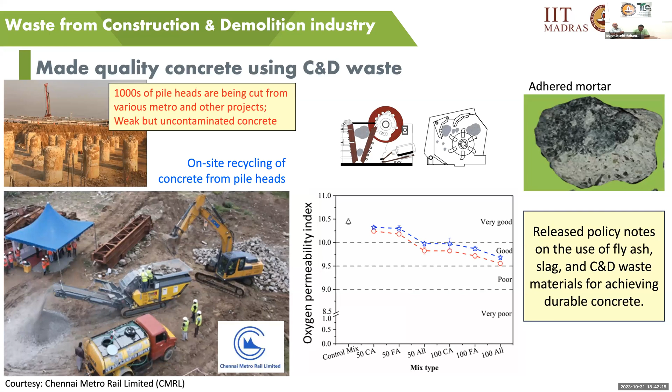Such concrete is very weak in strength, but at the same time they are really good, uncontaminated concrete, so that aggregate from such concrete can be really nicely used. In this demonstration project, we worked with Chennai Metro, and demonstrated how we can crush or process this waste and make good quality concrete. We looked not only at the strength properties but also the durability properties of concretes made with such material. We have also sent policy notes on how to use various waste materials in concrete.

Another project we took up: we have been working on durability of various concrete systems for several years, even before the TLC2 center came up. This was a good opportunity to take this research output to the field and implement it. In this project we worked with a government agency, the Kerala Highway Research Institute, where they were building a major bridge on the coast with a target service life of about 100 years. They were using M40 mix designs with OPC type concrete.

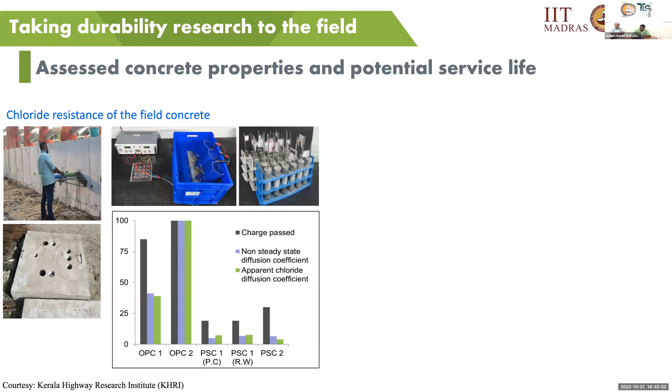We found that the durability of such concretes can be very, very high compared to OPC concrete. We also looked at service life estimates and found that by using slag concrete, the service life can be about 4 times more than OPC based concrete. This was very promising, and they were very happy. Now we know they are actually implementing this type of concrete in other bridge projects as well.

But to actually implement it on site with good quality control, we have to specify certain properties, for which we developed nomograms that look at the properties of the binders and structural design aspects. Then we say, if you use this, you have to go with this type of concrete, which will have a durability parameter I'm calling MXDY — M stands for mechanical parameters and DY stands for durability parameters. If you're talking about a target life of 100 years or so, we have to bring in a durability parameter to specify the concrete. That's the whole idea.

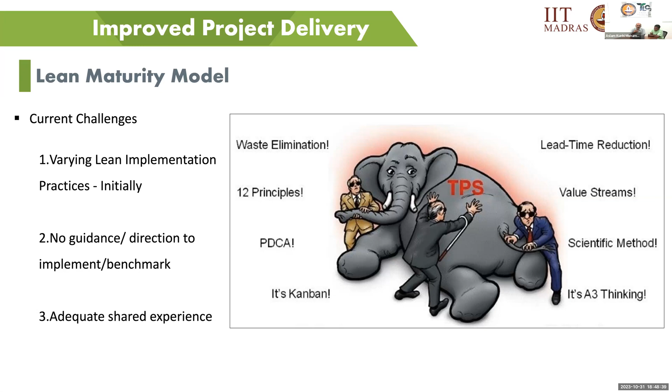Moving to the next slide - when we look at the lean maturity model, as I said, we needed a roadmap, and we also needed to assess. Several organizations claim they are implementing lean, but we wanted to assess where they actually are.

They might say they've been implementing lean for so many years, and they talk about the project benefits they've adopted, but we wanted to start - because in the initial years there was a bit of a distributed approach, since people needed to explore where they stood.

But we needed people to start converging on best practices, so we looked at a holistic approach to cover lean. We take these dimensions: top management support, process, people, partners, methods and tools, and technologies. These are the key dimensions where we feel there should be progress for holistic adoption of lean.

One limitation is there's no local context to the Indian context - when you try to take benchmarks from these models, there's no relationship to what's happening in India, so it just doesn't make sense. There was also an inability to do relative comparison and other issues - the models were too theoretical, with too many weighted indices, so we just weren't able to go forward with them.

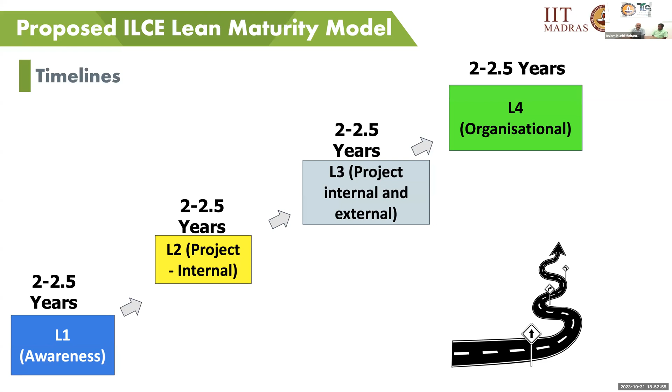So with this, we needed to start calibrating to see if this model works or not. What you see is a photograph of a cement plant under construction. A team of us went here and tried this. This group was implementing lean on the project, and we spent 2 days at site to look at all the dimensions.

You can see there's a full planning board there, teams of planning staff, and teams of execution staff also there. The impressive part of this group was that lean was actually practiced in several processes at the site level. However, there was absolutely no documentation. So when you asked, people knew things, but there was no way they could deep dive or go into more detail because there was no documentation.

So we are actually positioning this group right now at an L1 medium, because having a documented strategy and process is a very important part of being able to move forward.

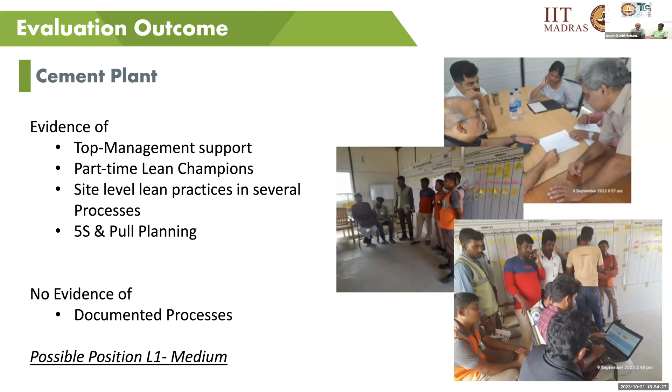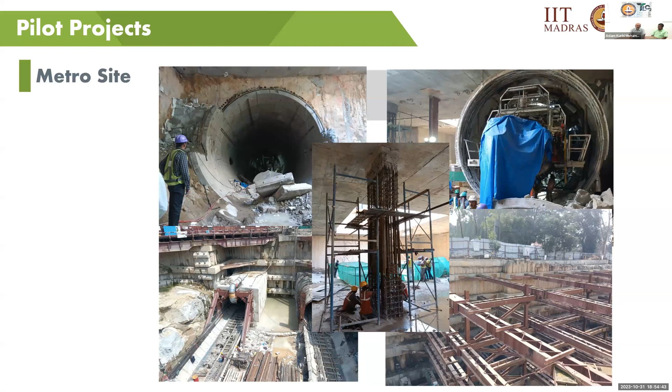Going to a second example, this is a metro construction. There are several metros going on site. You can see a little bit of the tunnel as well as the station construction. There were several stations in the scope of this work. We visited all the stations, visited the head office, and did meetings to assess what the kind of implementation was.

Here you can see there's evidence of top management support. There were part-time lean champions. They had very good documentation of the process, and there was very good awareness at the office. Any person you talk to in the office really had a good grasp of what they were doing.

But when you went to the site and started going down to the last planner, or into detail on how teams were actually implementing it on site, there was a breakdown in communication. So while the documentation was good, it looked like they could do a little more to get this thing going to the site. Of course, this was a much more challenging, much bigger site with a lot more details. So the best position, we have not yet placed them, but the best position they can go is L1 high. We are going forward with this.

Part of the TLC2 agenda is to be able to formalize this as a framework and get other projects in India to adopt these practices. And for review and refinement, we need more pilot projects.

And one of the feedbacks we always get is this has to be aligned with corporate benchmarking, whether it's with lean or with sustainability, and to bring sustainability parameters also into this benchmarking so that an organization does not have to do different kinds of maturity assessment, but does a holistic single-time assessment to be able to assess where they are.

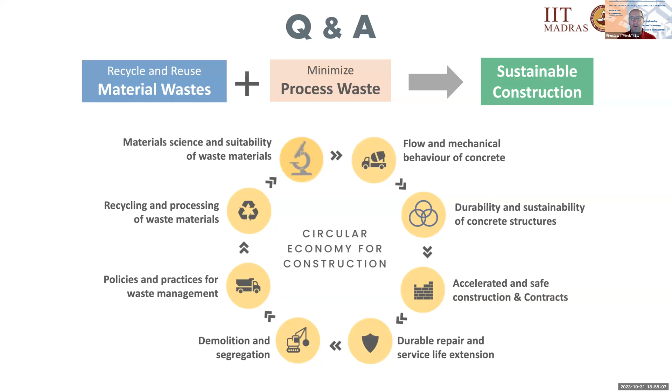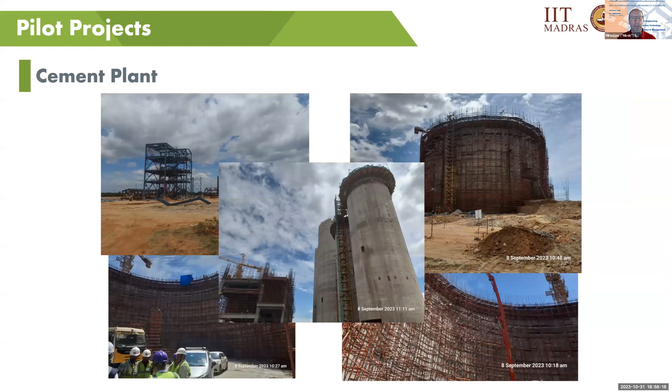Out of which grows the concept of Construction 5.0. It's essentially the effort to build upon the achievements to date of Industry 4.0 and Construction 4.0, and there's a lot of documentation and literature on that, to take advantage of information communication technologies and automation technologies and put them into service of sustainable industry, and in our case, sustainable construction. In other words, we are interested in environmental sustainability as well as economic, but with emphasis on environmental sustainability, as well as resilience, particularly to climate change phenomena that are, of course, very well discussed and always on the forefront of popular press and discourse around the world.

But in addition to that, there is also a renewed interest in human well-being. In other words, there is a need to emphasize the well-being, the satisfaction of work of all the participants, all the stakeholders that participate in construction projects.

I would like to ask the audience, anyone who would like to speak to that, as to how the ongoing efforts at IIT Madras relate to recycling of construction materials, recycling the waste in particular that is being generated. That waste is really staggering. According to statistics in the United States, about 60% of all the volume of solid waste in municipal waste sites is actually construction related. It's either waste from new construction projects or retrofit projects, or just outright demolition. And there is very little recycling.

According to some estimates, at least on the East Coast of the United States, less than 10% of construction-related waste is being recycled. The rest of it is actually ending up filling up the volume, the space in municipal waste sites. What can the existing body of knowledge in construction engineering and management accomplish in changing that?

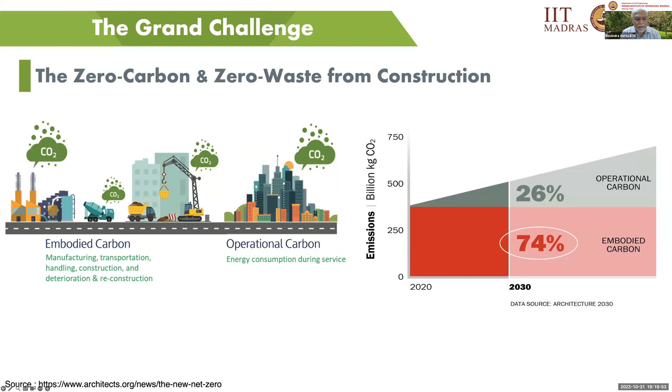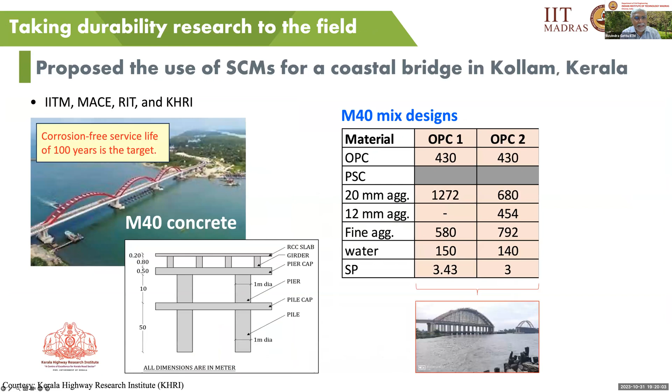So we said we'll try to come up with a framework, a chart for any site, which would have indices based on 4 components. One would be embodied energy, which also reflects the cost and use of raw materials. The strength of the concrete, what could be the mix shown here. The other component would be durability.

We insist that durability is key to designing something sustainable with concrete construction. We cannot afford to have something that's not durable enough. The 4th aspect would be environmental, bringing in the carbon footprint. We strongly agree that carbon footprint is not the only way to look at sustainability, it's much broader.

Now, as Ashwin said, we have to start looking at it from the design point of view. In a project Ashwin and I are working on together, we found that at the contract stage itself you have to know where your materials came from. When you put a specification out for bidding, the contractor has to be ready to tell you where all the materials came from and what the sources are, so you can calculate the carbon footprint.

Otherwise, you're stuck with a database which need not be relevant at all. You could have a database made in Switzerland and try to fit it into a concrete structure in Chennai, and it won't work at all. What we're also looking at is maybe a portal or database, a materials passport, where people can put up the values they obtain, not only for mechanical properties but durability and so on, so people can look up and make an educated choice of sustainable materials and technologies in construction.

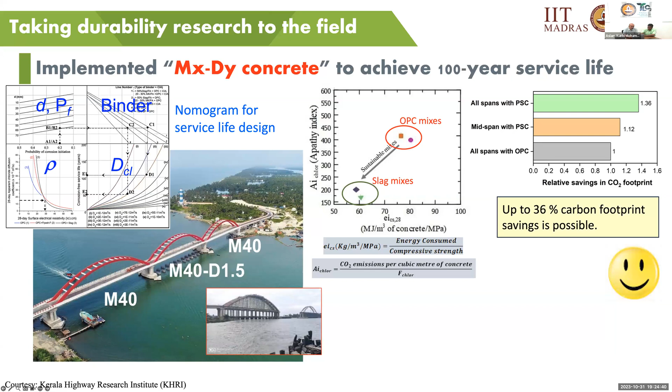So I'll start out with one dimension of it. I think we're going from the decision support or the tools, and as we know there are a lot of tools out there, but all of them are driven by data. So it's about the organizational effort or policies required to make sure the data we use to calibrate these tools is relevant. That's where I think we also have to start, because we've seen a lot of tools that are more conceptual, they do a prototype, and then say if you feed in the right data it becomes okay. But it's where we have to start, with the data.

And I think this is specifically, as Ravindra said, in the Indian context, there are a lot of pipelines we have to develop to start gathering this data.

And we see that these pipelines are starting to fall in place, as policy in the government and policy among clients changes. For example, the project you talked about at IIT Madras, we are saying we want to be able to select the contractor based on the material passport, what you show as your material.

So once these policies fall in place, I think the data will start becoming more available. And in parallel, we have to look at the technologies we are going to use. This also relates to your earlier question on design. In terms of the processes we use to bring in the right materials and integrate this with design, we are going into a multi-criteria decision-making kind of issue.

And we have a lot of models which can do that, but ultimately, how do you calibrate these models? How do you bring it back to your decision-making preferences? These are the tough questions we have always had to answer, whether it was 25 years ago or even now, and those questions will remain. But probably the optioneering available today with computing power and technology, the options we can generate to see what-if scenarios, the simulations we can run, will give us a better way of coming to the right decision, the decision we would want to take as part of policy. So that's the way I would look at it.

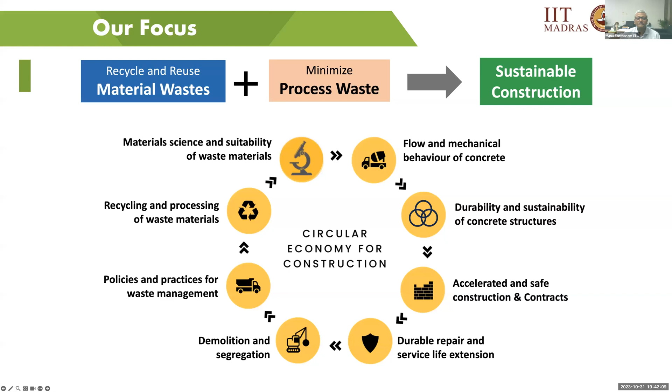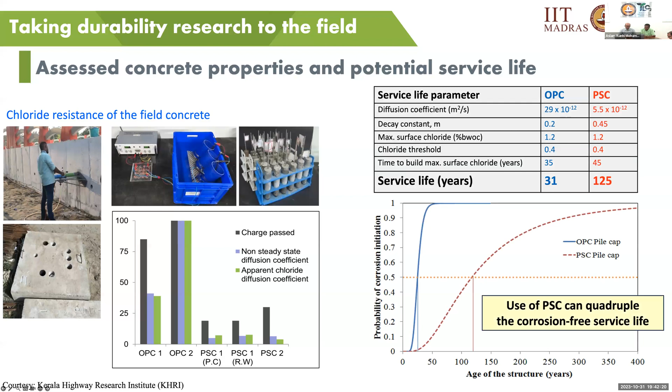I just wanted to take a couple of minutes to inform people about the kind of plans we have going forward. I think many of these are set to answer several of the key questions that Professor Mirek had raised. So we have a plan to have a TLC2 Experience Center.

The idea of this Experience Center is to look at how we can develop strategies to implement state-of-the-art research that we are currently involved in pilot scale applications. We also want to look at evaluation of alternative materials and processes, strategies through physical and virtual test beds that we'll be establishing in this Experience Center. One of the major objectives of this TLC2 Experience Center would be to train human resources to essentially propagate the kind of things that we are trying to work on in our research.

And of course, this will also involve engaging with industry through consulting services on several sustainability related aspects, including policy, auditing, contracts management, and all the other research that we are already currently doing with respect to materials and processes. The other idea is to bring out new products and methods into the industry. Engagement with startups is going to be one big activity in this experience center. We hope that all those who have interesting ideas in this domain will come forward to integrate and work with us.

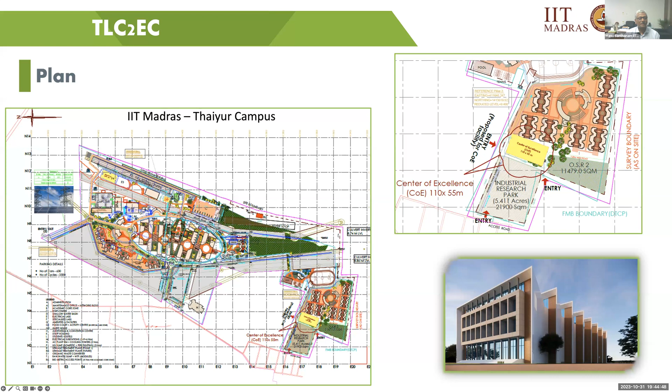What we want to do is have a workshop space that looks at processing equipment for aggregate. That is obviously one of the key areas that we're looking at. We are also looking at industrial agricultural waste processing and cement production related equipment that can help engage even the cement industry and other manufacturers who are doing alternative materials manufacture for concrete applications.

3D printing is again one major aspect that we'll take a look at in terms of different types of printers which will be housed in the facility to try out various different ideas with 3D printing. We'll also have a facility for large-scale testing, not just 3D printed wall panels, but also looking at precast segments and tunnel linings, and also develop facilities on structural health monitoring.

We also intend to have a pilot plant for solar-enabled thermal treatment for recycled concrete aggregate. This is something that was developed at a smaller scale in research in our group in the last couple of years. We want to take this to the next level and try and propagate this idea to the construction industry.

Additionally, the building will also have space to train people and house sophisticated instruments, a mechanical properties and durability lab, along with labs to look at lean construction aspects like BIM and LCA, and also a virtual reality experience lab that can help us visualize several of these processes that lead to much better strategies for the construction process.

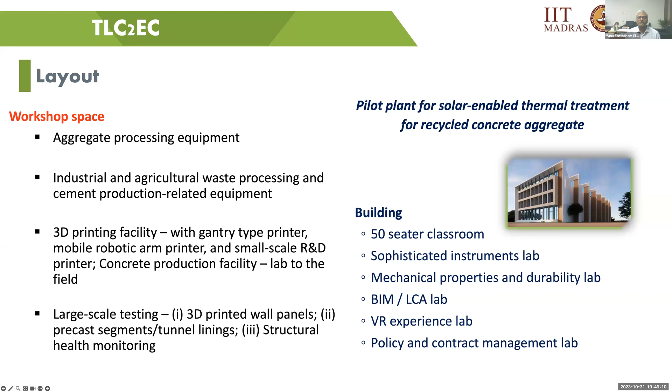Thank you. Over the chat, I was seeing a lot of excitement by young engineers from different backgrounds, not necessarily only civil engineers, but data scientists and mechanical engineers are getting excited about this. And we encourage that.

We would love to meet some of you perhaps through the link that has been sent to us. Send us your queries, the kind of ideas that you have. We always have opportunities to engage with students through projects and internships, so that is definitely a channel we can explore. You can visit us, see what kind of work we are doing, and see where you can contribute.

In fact, you would be surprised that some of the leading startups in this area are founded not necessarily by civil engineers, but by mechanical engineers and data scientists graduated from IIT Madras and other universities. So these days the knowledge is becoming interdisciplinary, and we stick to those principles. So please reach out to us.